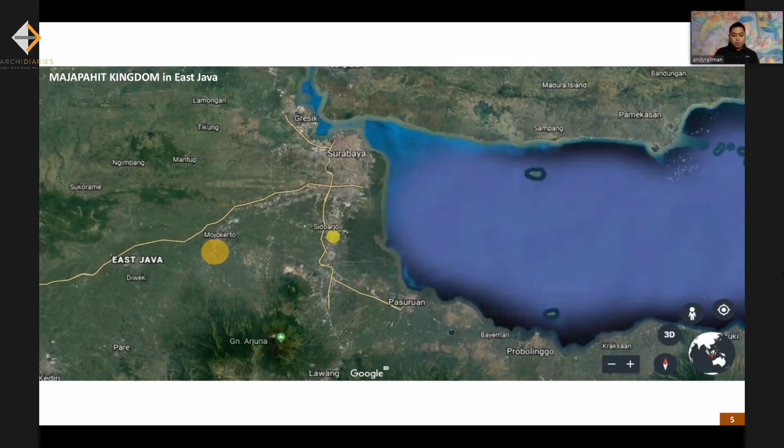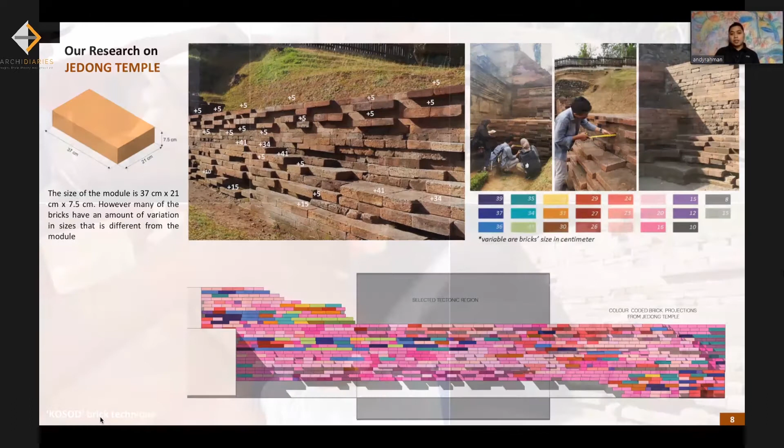We have researched and studied the site until now. We are always curious and have many questions, like how could they arrange the tectonics? Why did they make that form? And mostly amazed at the bricks joining technique. And then we found what technique our ancestors used to build the temple with brick without cement.

This technique is called kosod bata. Kosod bata technique, or rubbing brick technique. A technique of rubbing two bricks by giving them water, then leaving them to dry. Brick powder and water react into a natural adhesive. After drying, one brick will stick to another brick, and this is strong.

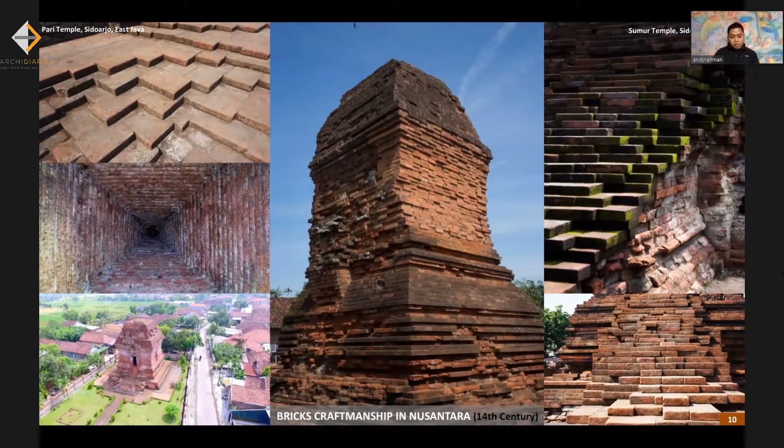So in those days, our craftsmen built these temples without cement. The brick structure can be tight without gaps, as you can see. The result is very sophisticated. In our analysis, I found something interesting near our project site, Omah Boto. It is close to Pari Temple and Sumur Temple, which have very interesting brick tectonics. These temples were built in the 14th century and never collapsed until now. It is also interesting because brick architecture with a spatial structure system can withstand earthquakes so well.

This is the Pari Temple. And I tried to come and witness the production of red brick in the home industry, because we wanted to know how bricks are made in Mojosari, East Java, where the Majapahit Kingdom was. There is one village where the entire population works as brick makers.

We observed the process and discussed with the craftsmen there. We tried to understand as deeply as possible the brick characteristics from the making process. Then we explored it in our projects, and it became the building DNA. This is the location map of Omah Boto, this one. And this is Pari Temple and Sumur Temple, and this is the capital city of the Majapahit Kingdom. It's about 20 kilometers.

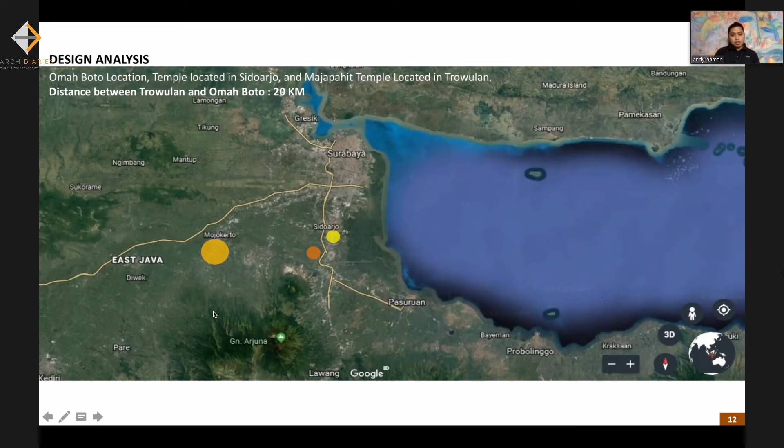We use MRH brick from the Mojosari home industry in the Omah Boto project. MRH is the initial of the craftsman who designed this press machine, from his wife's name, Mufaroka, so MRH. When we researched this brick, there was something unique: the MRH brand name on it.

This stamped brand creates a hollow around the MRH font that we can utilize to hide the cement material, so that the tectonic design can resemble the temple tectonics. MRH brick became the DNA of the whole house. The module size of the bricks determines all of the house elements' dimensions, even the doors, height of space, fans, and others.

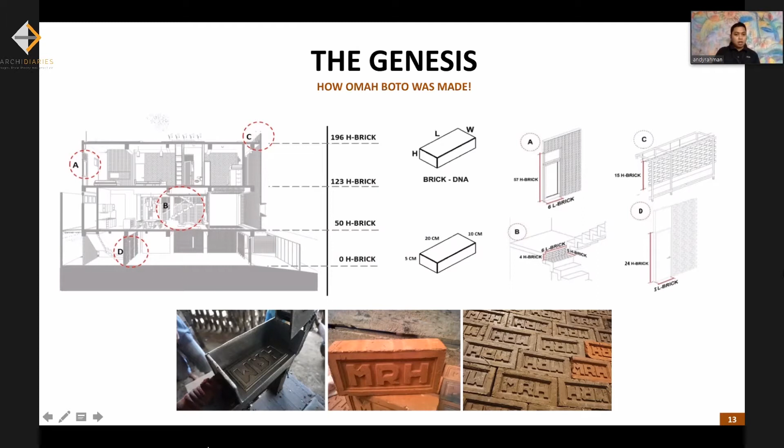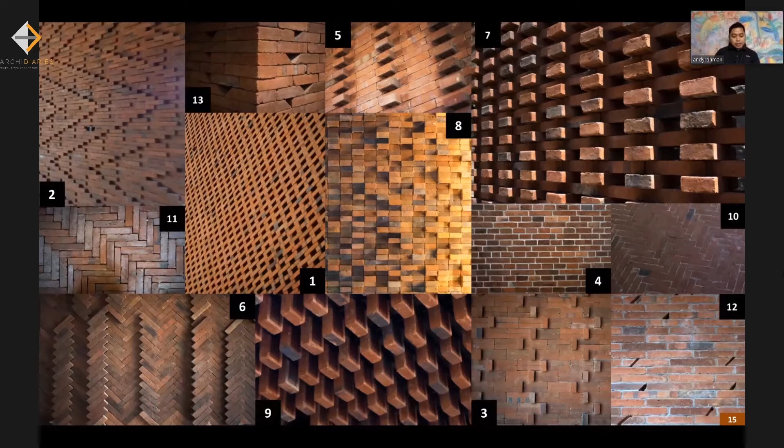And this is the result. The techniques of brick arrangement also embody some of Indonesia's batik pattern, and this is the owner's desire to make his house have strong Indonesian character.

We can hide the cement within the MRH brand on these bricks, so that the tectonic appearance is similar to the temple's tectonics, but is modern. Exposed bricks originality creates a unique view from its side of wall, floor, or even a ceiling.

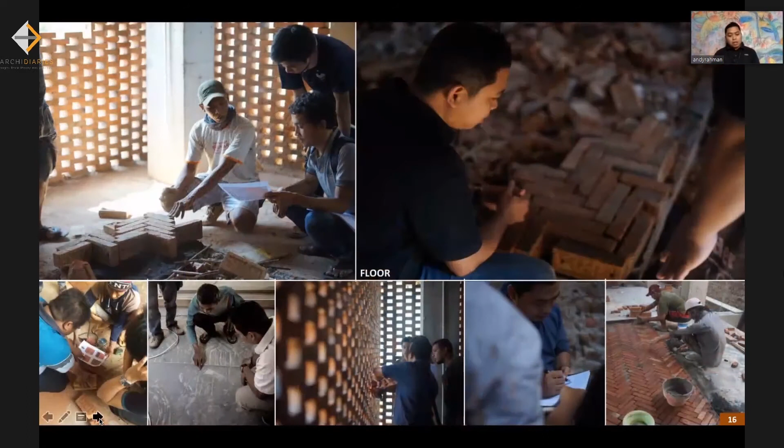Along the process on sites, all knowledge is reciprocal. When the craftsmen meet some difficulties, they can communicate to us, and they can also give feedback and ideas that are more efficient about the installation process. We, as partners, collaborate, and we become a team.

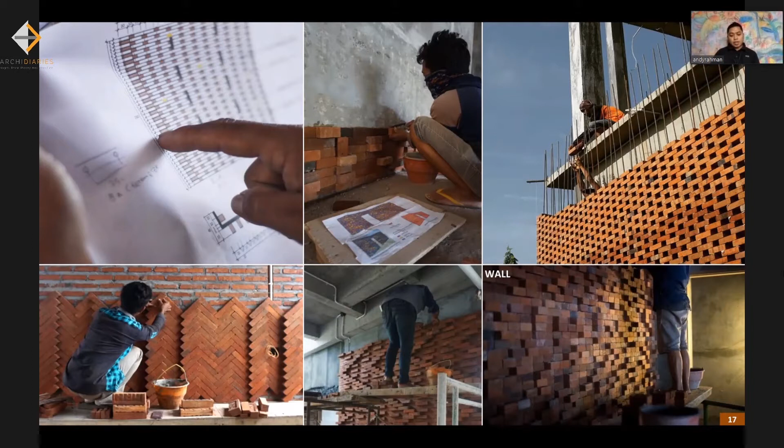This is the process of how they read the architectural drawing code, and they work with sense, with heart.

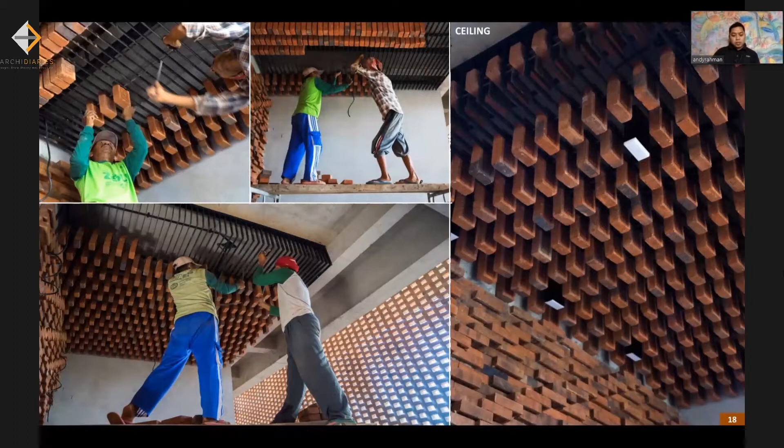We always try to explore the local material and give it value, and try to give the challenge to our craftsmen. And that's nice because our craftsmen always answer our challenge with very good, simple technique, but the result is sophisticated.

This is the other process, how they use iron to become the structure. They drill the brick. They can process this because our craftsmen understand the characteristic of the bricks as well. So the result is beyond the ordinary technique.

And this is the result. This is the facade of Omah Boto. This is similar to woven bamboo in our tradition, but this is a woven brick.

The function is the same. So when it's night, the light goes through from the inside, but at day, the ambience inside is very nice.

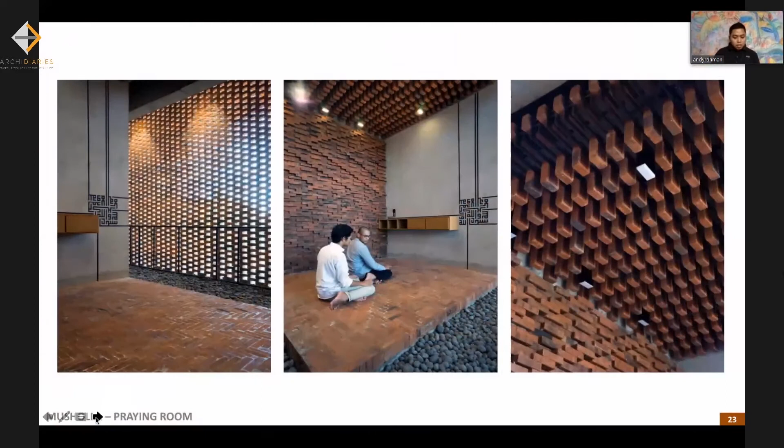We are not only applying brick in the floor and wall, but also try to use it vertically on the ceiling.

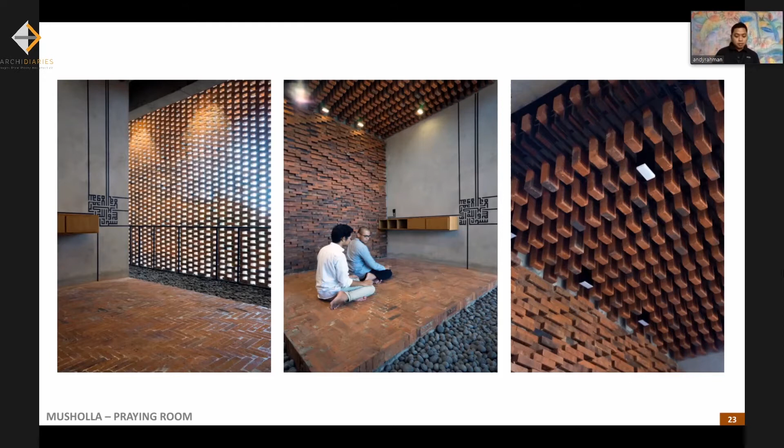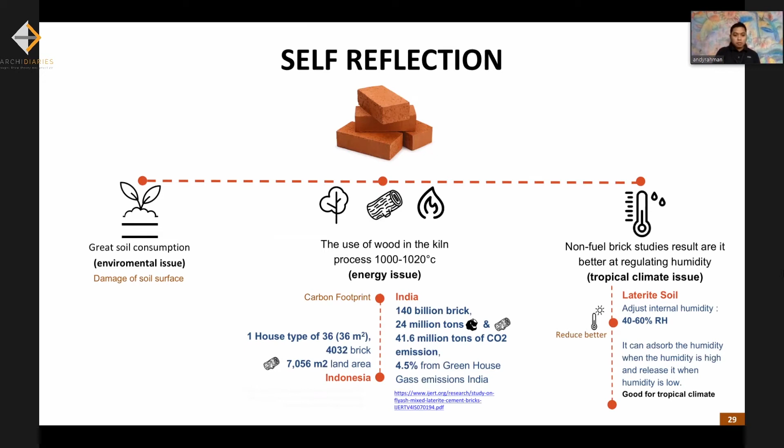I began to explore, research, and try to create sustainable bricks, an earth-friendly type, the handmade bricks in modern context. You can call it non-fuel brick, using laterite soil, one of the great soils on our land, an abundant material in Indonesia.

This is the process of laterite soil forming. So laterite soil is a solution to the issue of using fertile soil as building material in Indonesia.

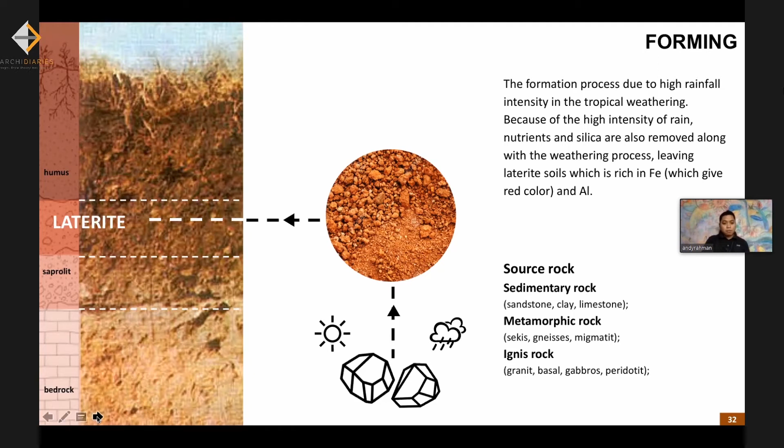The characteristic of laterite soil is the natural red color; higher iron oxide content gives a redder color. The texture is sturdy and dense. When it's freshly cut or dredged, it has a soft texture, but it becomes harder when directly exposed to the sun and air.

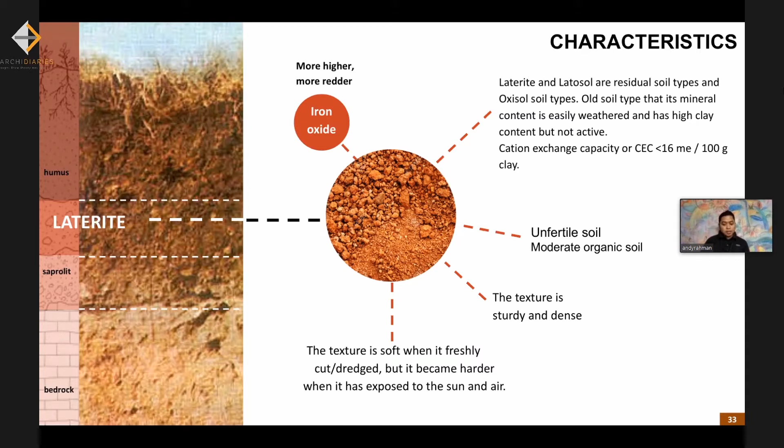This is the data that we have got. The laterite soil around the world covers 30% of the land, mostly around the equator, like Indonesia, Africa, and India.

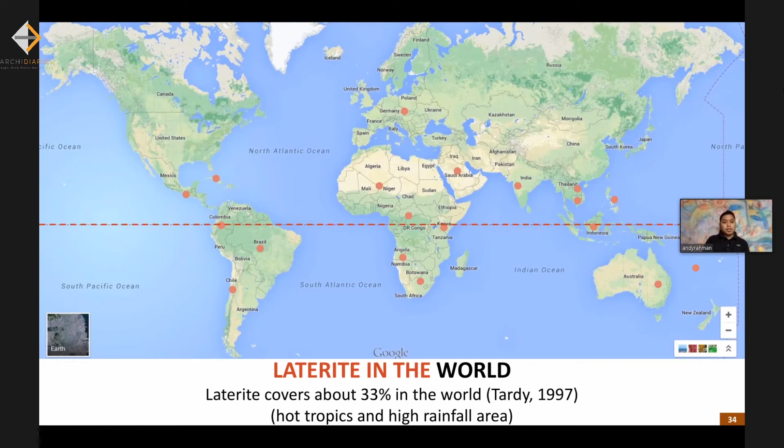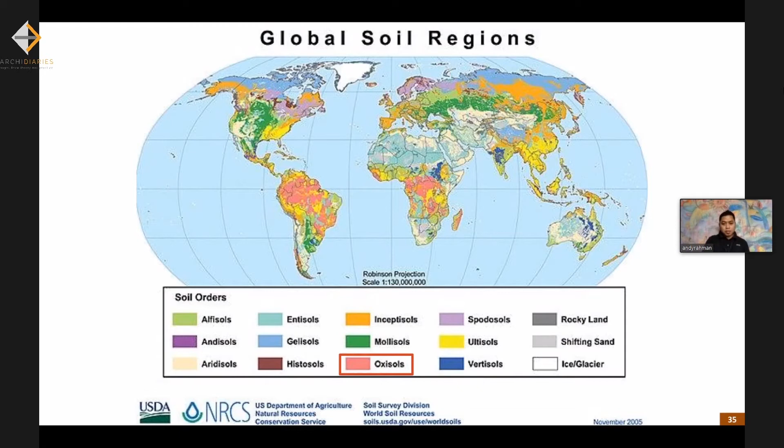This is the map of laterite soils, the oxisols type, shown in pink color here. This is the content type of laterite around the world, and Indonesia has nickel ore laterite, containing nickel ore.

In India, many laterite soils were found in Kerala or Goa, in West Bengal, and in Tamil Nadu. Last year, when I went to Kerala, I had time to visit the Laurie Baker studio, which was also developing laterite bricks.

I think all of you must be familiar with this type of brick, or even just notice the soil. Last year, in our office, there was one student from Kerala, Puja Prakash, who got an internship in our studio for 6 months. She learned about how to make brick from laterite soil.

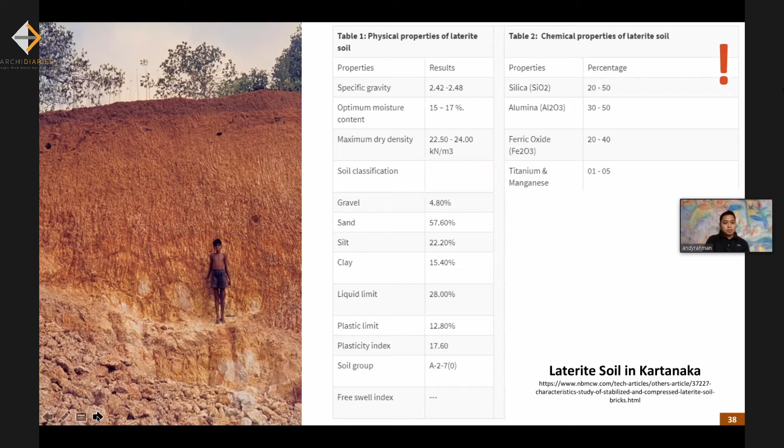Previously, the making process of laterite bricks was only cutting them into pieces, because it has a soft texture, and allowing them to harden before use. But in the long term, exposed to rain and heat, it eventually erodes.

Laterite in Africa too - last year, unexpectedly, we received one student from Africa. So not only from India, but from Africa too. His name is Golfa, he's from Mali, and he learned a lot about the technique to make laterite brick. Right now he sent me a picture of what he has developed in Mali. I'm very glad.

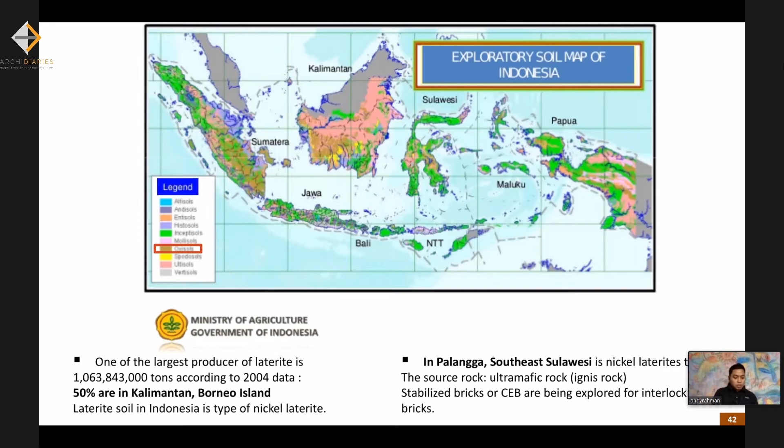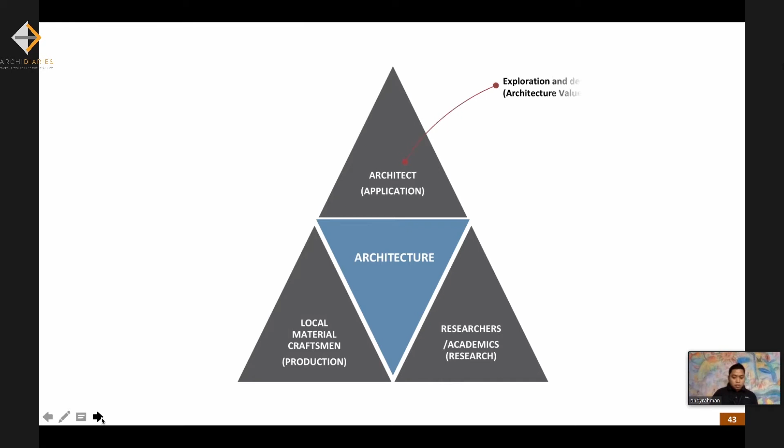This is what we have been doing for at least 5 years. We think that as an architect or planner, we will not be able to develop without involving academic researchers and local craftsmen, because these three components always support each other.

I have collaboration with my Professor Toto, my colleague who specializes in local material research, and we go around to meet craftsmen who have the same vision as us.

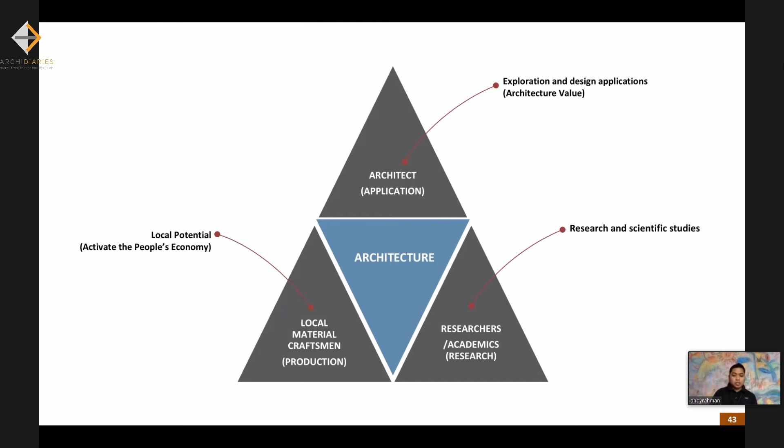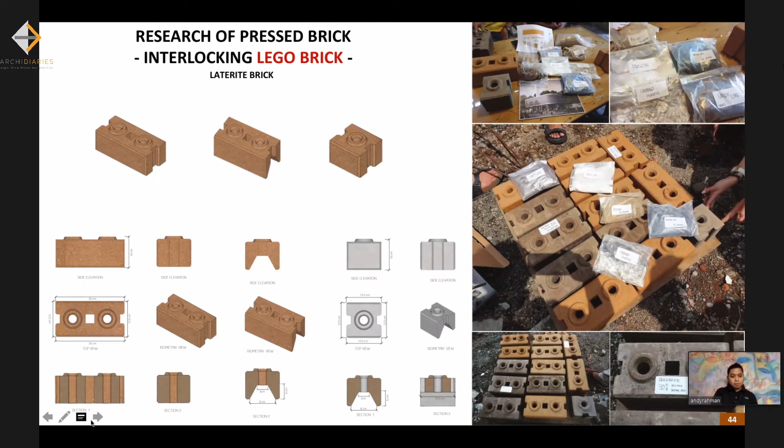Then we have research on pressed brick, the interlocking Lego brick, and developing the process. This is the making process of laterite Lego brick - a non-burn brick that is more sustainable.

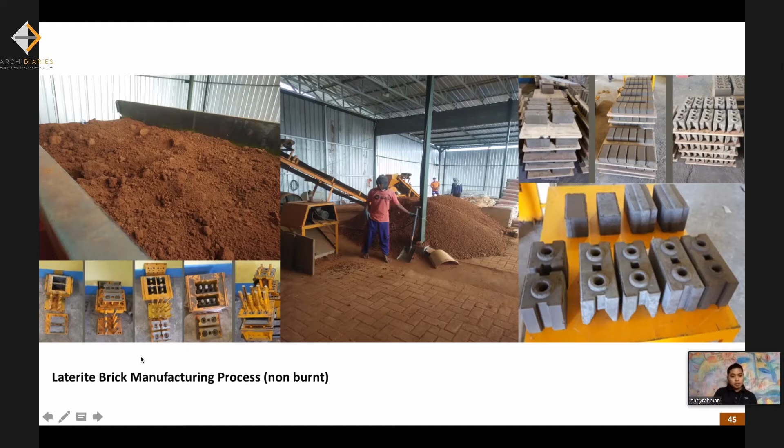There is something unique about Lego bricks - we call them three-dimensional bricks. We can say the ordinary brick is two-dimensional, and the Lego brick is three-dimensional. Meanwhile, Lego bricks are spatial bricks. We can explore it like applying Lego to create the tectonics, similar to applying Lego.

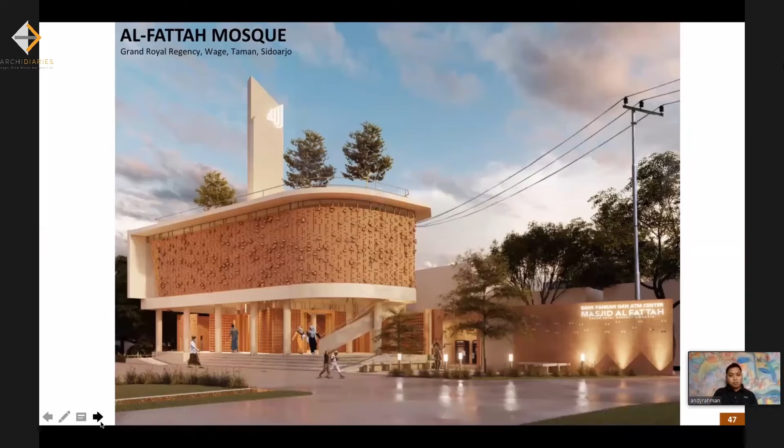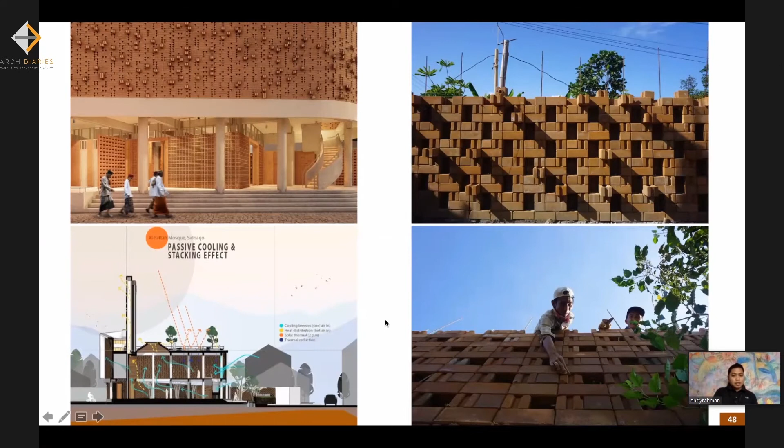This is our project in progress, using laterite soil brick 100%. We didn't use conventional brick anymore in this project. These are the processes of design and construction. This is the tectonic.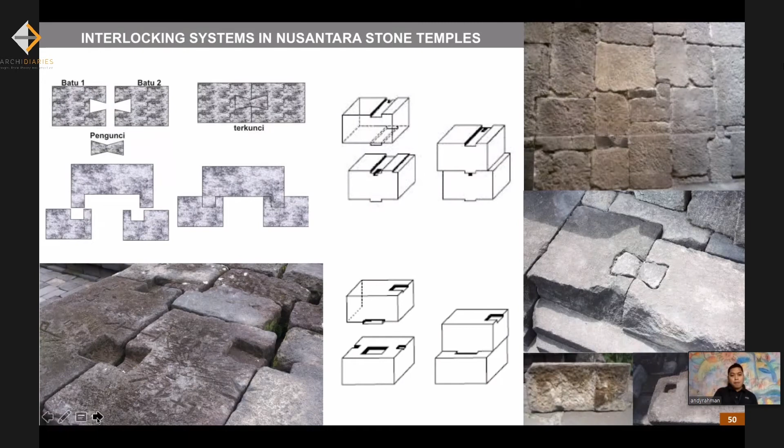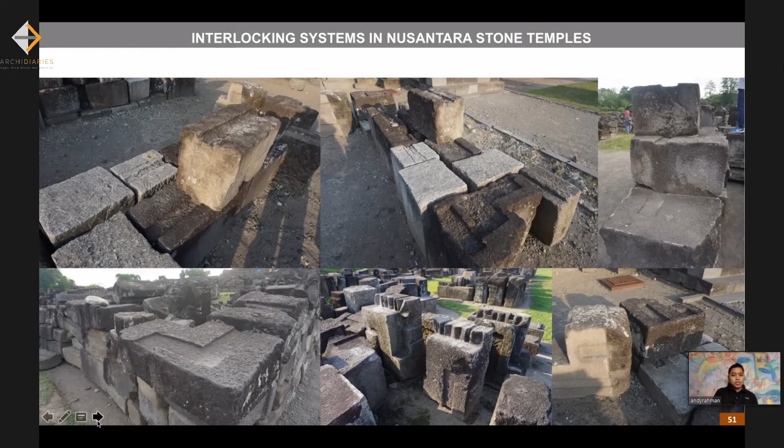It really amazed me, all the ancient architecture that treated materials with great techniques, soil or even stone like this. Our ancestors could build Borobudur temple and Prambanan temple.

Our curiosity arose after seeing these temple details in Borobudur temple and Prambanan temple in Yogyakarta, center of Java. That's why we had the spirit to research the temples - how our ancestors built both temples without cement.

It turns out that's why we developed the interlocking system - because the technique relies on the weight of the material itself.

Borobudur, as you can see on the left, is the largest Buddhist temple in the world and has entered the 7 Wonders of the World. Prambanan temple is the first high-rise building in Southeast Asia, in the 9th century. Both these temples were built by an interlocking system without cement.

That is what inspired us to make interlocking brick. In the interlocking stone techniques, it can overcome the lateral force of earthquakes.

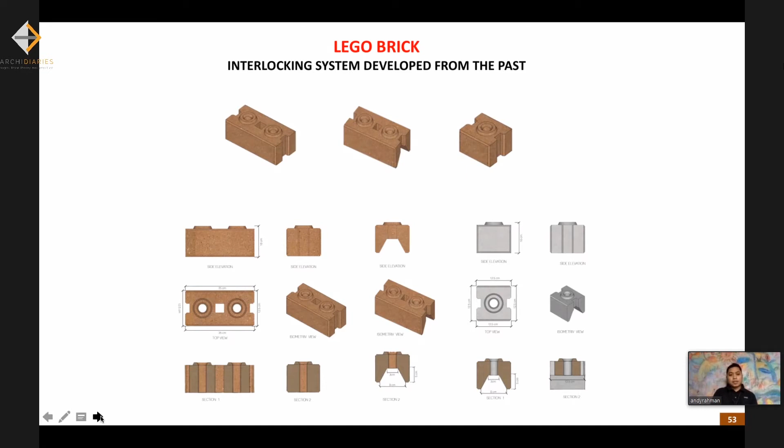So we developed it further - we added one element, one feature: we give a hole, as you can see, in the brick for the iron and cement aggregate. This creates a knot between vertical and horizontal force, so this Lego brick accommodates earthquake force better than the interlocking system our ancestors developed.

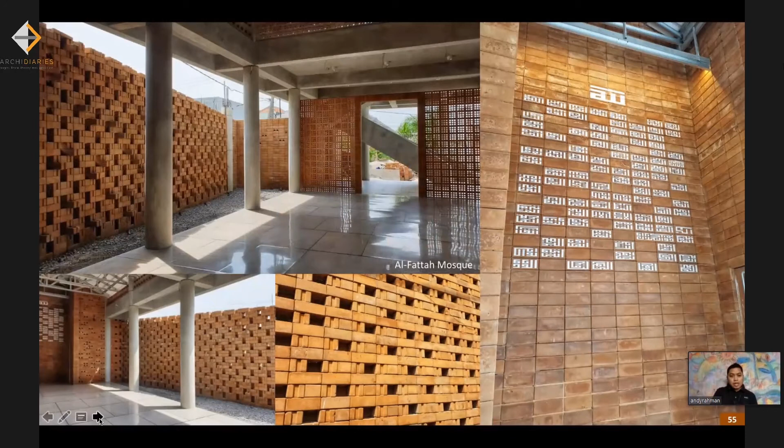This is the condition of Al-Fattah Mosque, still under construction right now. This mosque is 100% built with laterite soil brick.

We are trying to explore the future brick - what is the future brick? We are trying to think of alternative materials that are able to face the next challenge, developing from basic materials. The basic materials are local soil, waste, and recycled materials.

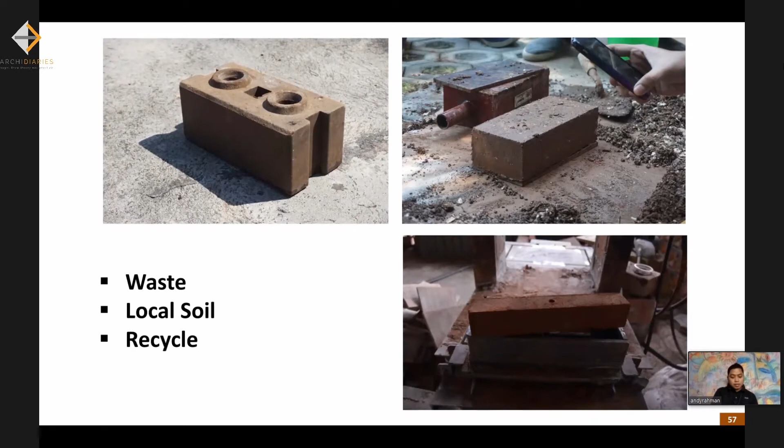This is bricks from fly ash and bottom ash, waste from near my place. We have got this coal burning waste from the power plants industry in East Java. And now research is going on into the Lego brick that uses perlite.

So the brick is made from many types of material, from coarse plastic, from fly ash, from bottom ash, from perlite, even from the coarse of wood. We developed so many ways to make the material of this brick.

We try to apply the fly ash and bottom ash brick in this project, an Islamic boarding school in Probolinggo, because this boarding complex is nearby the power plant industry in Probolinggo, East Java, and has so much of the coal waste. We presented this project to the director of the power plant industries, and it will be built from their waste material.

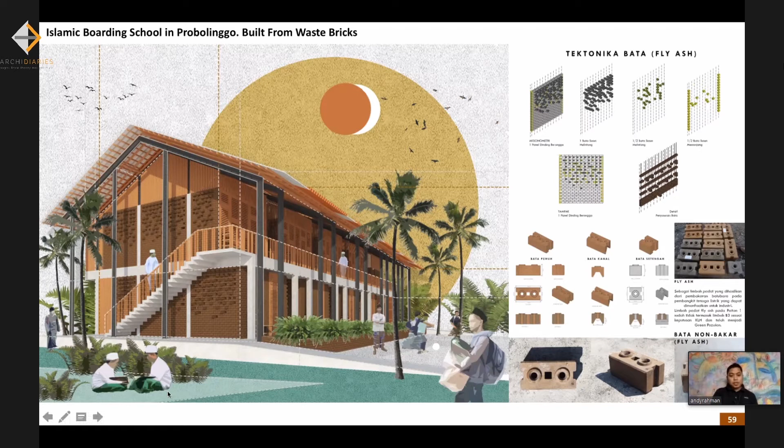We show them the brick mock-up like this, our research, and they are really excited and agree to help build this building. We held a workshop in my office to teach the people from Jombang to make brick from the local soil. This project is mostly in Jombang, East Java.

It's built from local soil brick without burning. We teach the people, the community, to make this brick and build the mosque by themselves.

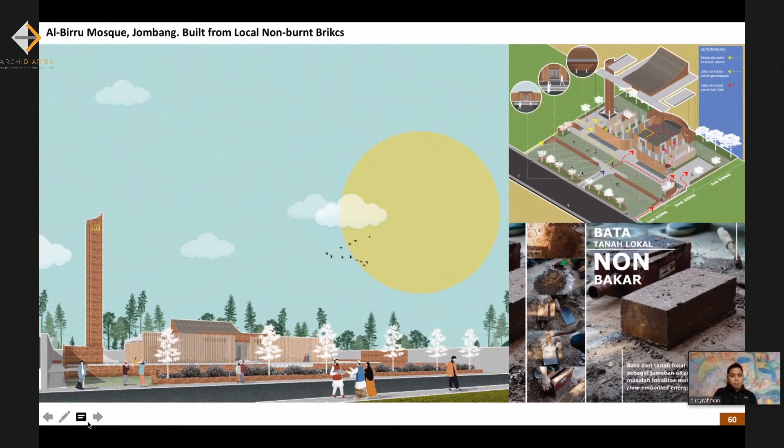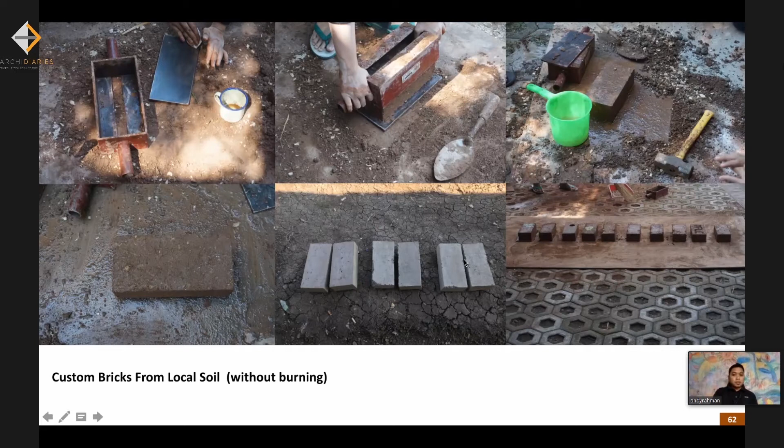We held a workshop in our office to teach them, and when they have understood and succeeded, they will come back home, to this village, to teach the others, and make the mosque by themselves.

The uniqueness, the sustainable materials, the characteristics make it low footprint but big impact on our design and environment. So this brick solves two problems: one is local materials, and two is benefits. And this soil can involve the people, not only craftsmen but ordinary people can make these bricks, and this is a very, very sustainable brick.

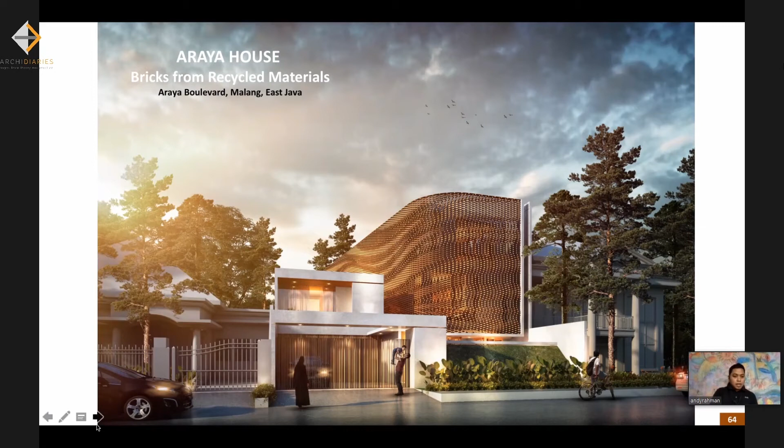This is our project in another city where we designed a custom brick, the tectonic. We're trying to make a parametric approach for this project. So for this brick, we cannot use the ordinary brick; we should make a customized brick.

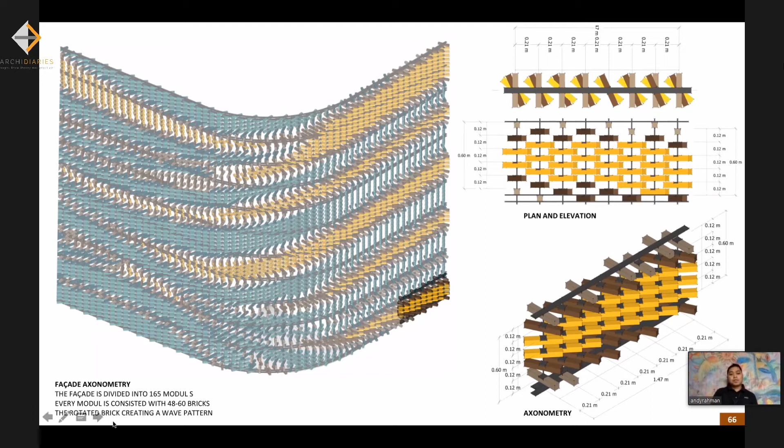That brick was made of waste materials, the shards of tiles, the disposal waste of terracotta, like tiles, bricks, earthenware, roofing, and so on. This is waste from the process, the making process.

In Plered, in Purwakarta, it's a city of terracotta. There are so many home industries there producing terracotta materials, and the making process always generates maybe 20% waste, which they throw away everywhere like this.

So we're trying to collaborate with the local craftsmen there to make this waste become a new material. Like this one, a customized brick. Sometimes we create a fan block from this material.

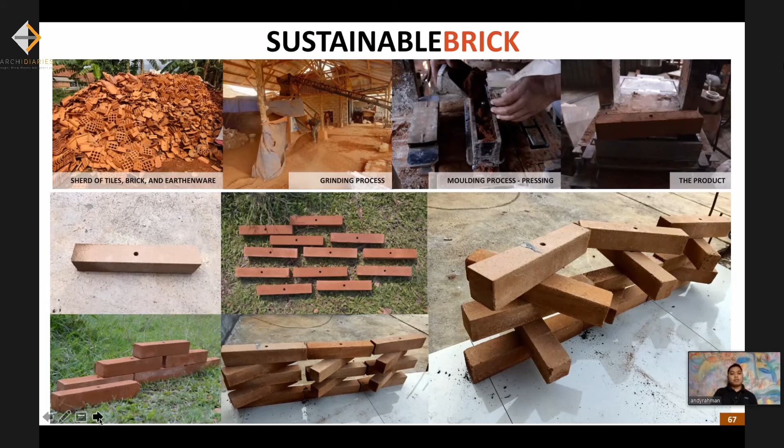So we're trying to involve the local craftsmen to make customized brick from recycled bricks, and this is very sustainable. This is our study in our studio; we make mock-ups with our staff and craftsmen before we apply this tectonic in our projects.

We always try to make and develop various types of custom bricks depending on the project's context, collaborating with local craftsmen to make sustainable materials. So these are many types of bricks we have produced with our partner local craftsmen.

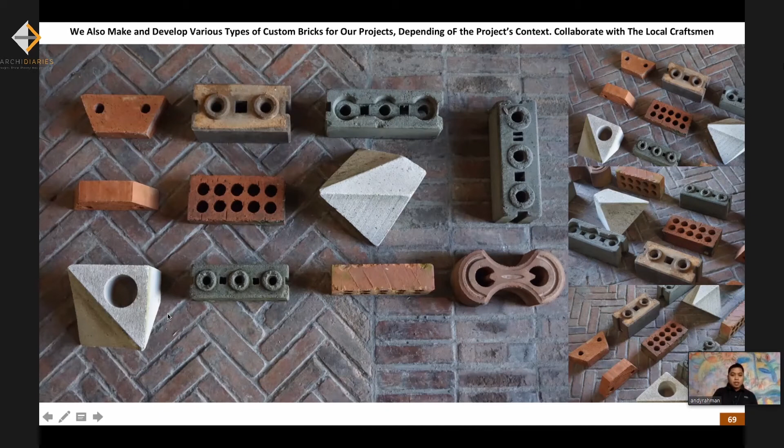From so many types of waste and local soil, because we have a principle: we're trying to develop architecture from the DNA or the cell, and the cell is the brick itself. At least but not least, there will be many new possibilities in architecture, because architecture is designed from the cell like this.

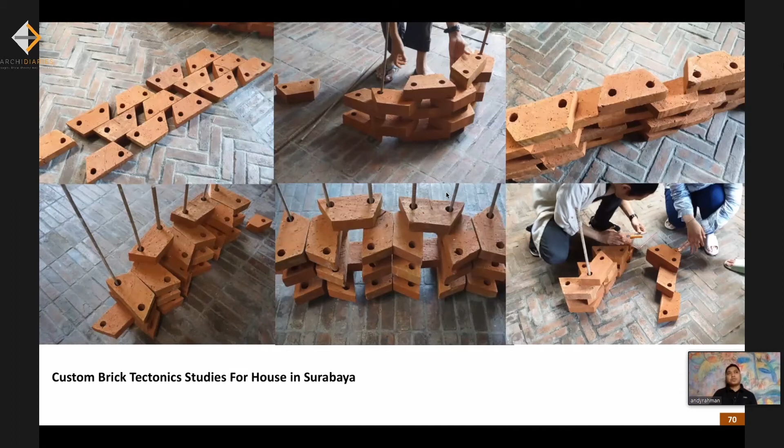This is an example from our project. When we make a brick with a trapezoid shape, we get a lot of new possibilities and expression in our architecture, which we cannot get when we use a square or conventional brick.

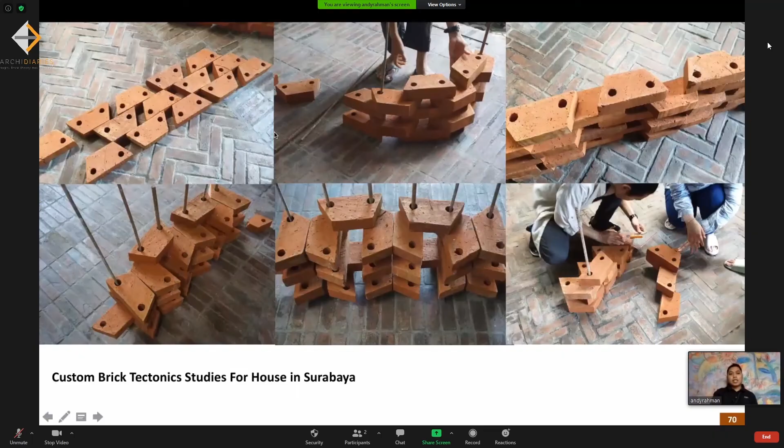So we only do simple things: the square bricks are cut on two sides to become a trapezoid shape. When we study this in the mock-up with our staff in the studio, the result is so many possibilities like this, which cannot be reached when we use only a square brick.

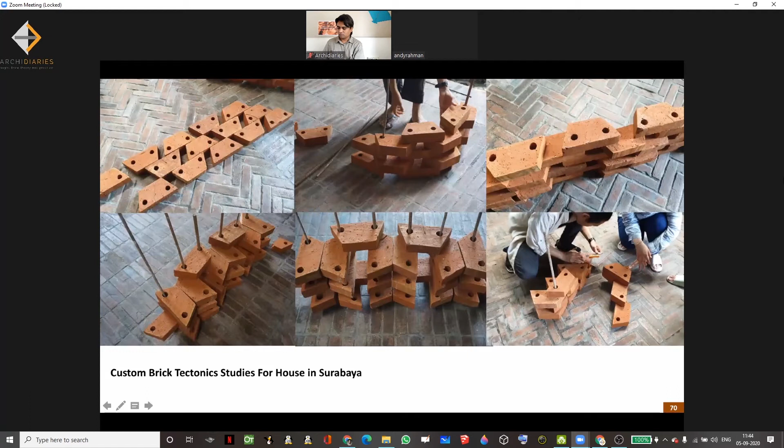And I think that's what I can share today. I hope all of you can take something good from my presentation, and thank you so much.

On one hand, you want to preserve the craftsmanship that exists, that works with the brick. On the other hand, we cannot go ahead and use the same burnt bricks because of the issues it has in terms of the soil and the energy that it consumes.

So, on one hand, we are trying to preserve the craftsmanship, and on the other hand, the idea is to find as many better alternatives for burnt bricks through using, let's say, local soils or various other waste materials. So that was really a fascinating journey.

It depends on the research. We're trying to research the composition to make a better composition for fly ash brick. And the fly ash brick we researched didn't need lime for the composition. It's only cement and the fly ash itself. With several soils, we need calcium for the composition, not only cement.

But it depends on the characteristics of the soil or waste. So it needs research before we find the best composition for each brick, depending on the material of the waste. Yeah. So you've been using cement along with fly ash in these cases? Yes, yes. Okay.